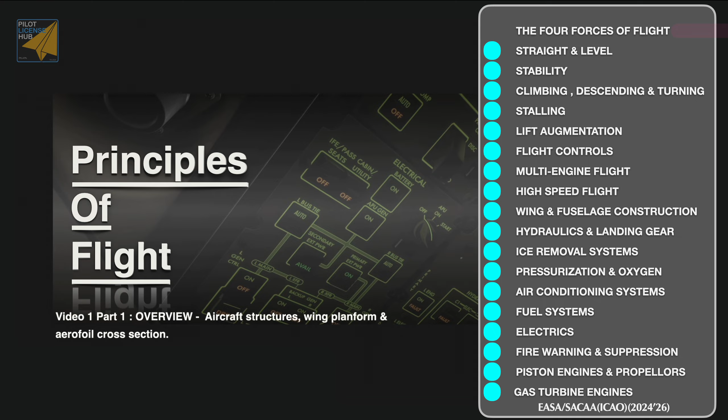Unlocking the secrets of flight requires more than reciting facts. It demands an appreciation of the core principles that keep an aircraft airborne. In this overview, we explore the primary concepts you have to grasp.

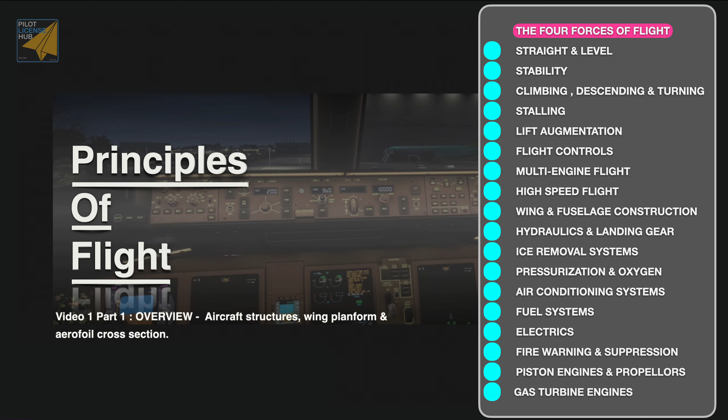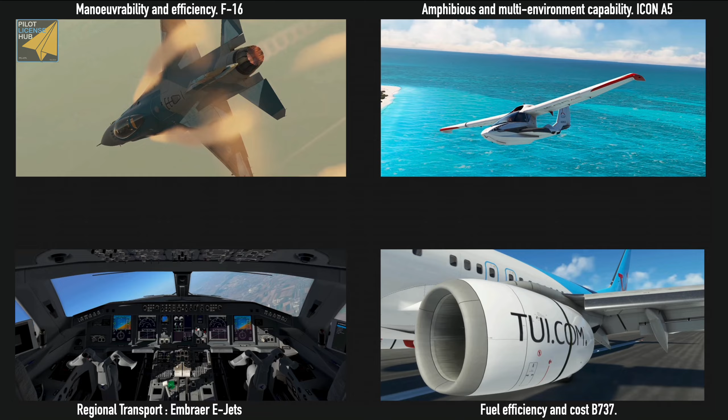First, an aircraft isn't merely a fuselage. It is an integrated wing system where five basic components, including the engine, landing gear, and control surfaces, work in unison. An aircraft can be designed for a variety of reasons, such as amphibious and multi-environment capability, maneuverability, fuel efficiency, and cost or regional transport. Depending on its mission, be it military, transport, vertical takeoff, or another role, designers may even shift the focal point away from the fuselage.

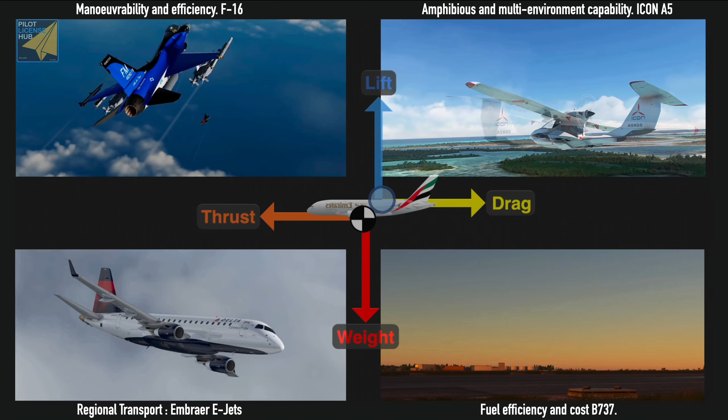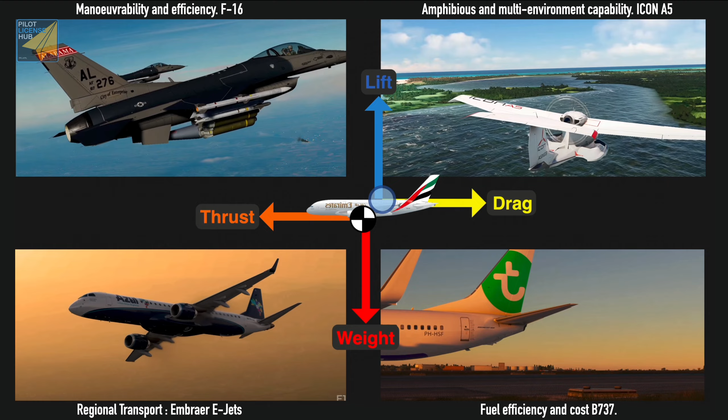Second, there are four pillars of flight: weight, lift, thrust, and drag, whose dynamic interplay is both fascinating and sometimes counterintuitive. This presentation will lay the groundwork for a deeper, more practical understanding of aviation.

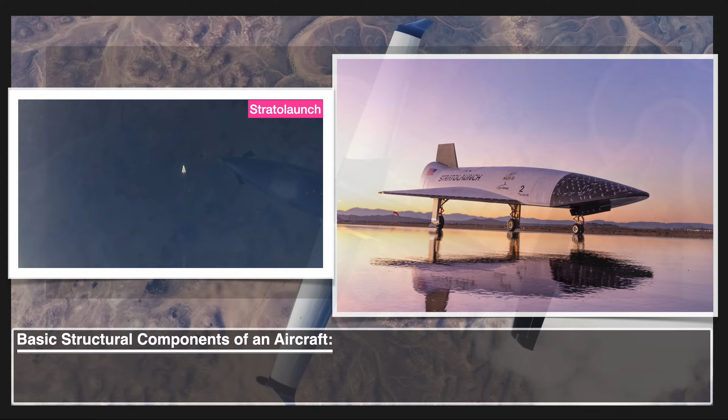Although all aircraft share basic elements, each component is carefully optimized to meet the unique performance standards required by its intended use. To understand where we are today, we must look back at where it all began, from the Wright brothers' first powered flight in 1903 to today's modern hypersonic jets. Innovations such as metal fuselages, jet propulsion, and digital avionics have revolutionized aviation, making flights safer, faster, and more efficient.

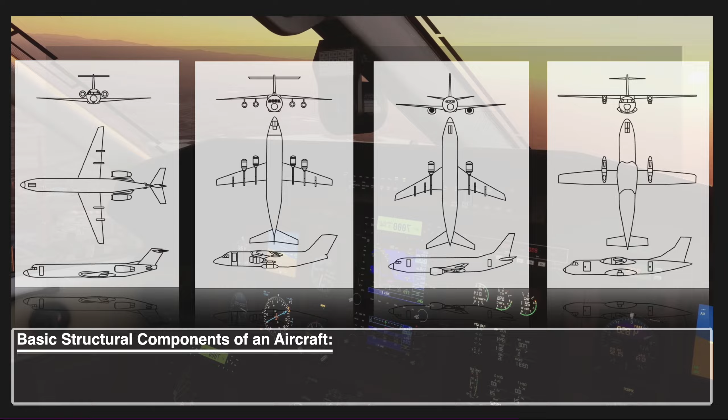The construction of an aircraft involves assembling key sections, each contributing uniquely to its operation. The fuselage, which houses the payload, whether passengers or cargo, serves as the aircraft's central structure.

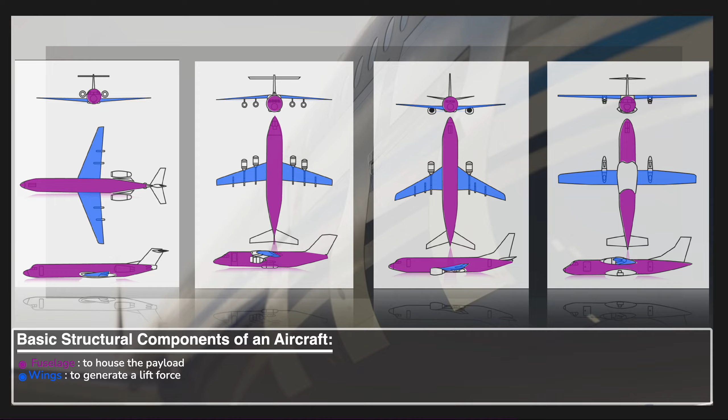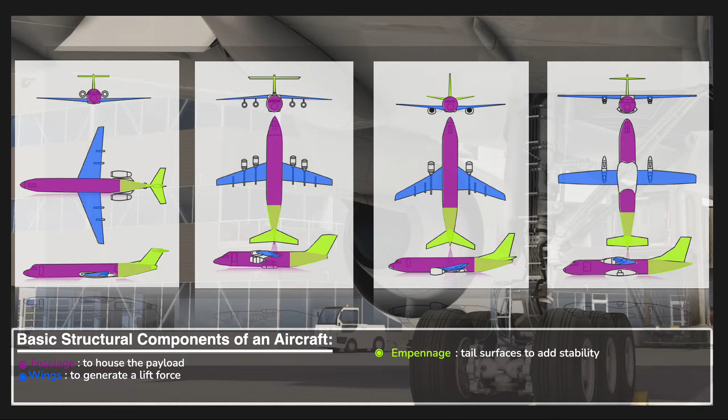Wings provide lift and are often optimized for specific flight conditions such as speed or altitude. Stabilizing surfaces, like the vertical and horizontal stabilizers, along with control surfaces such as the rudder and elevator, ensure maneuverability and balance.

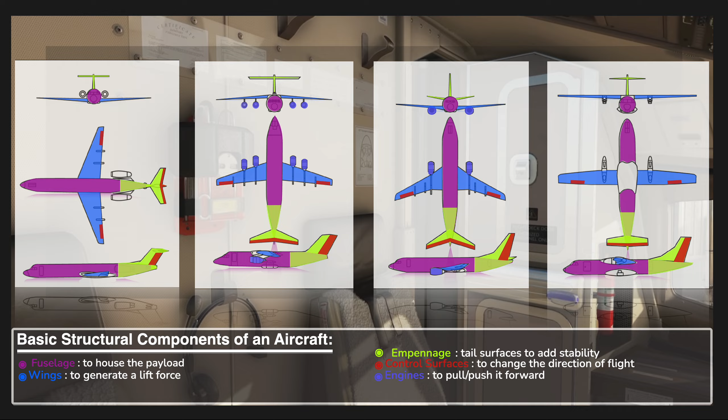Propulsion systems, or engines, generate thrust, while landing gear is designed to absorb shock during takeoff and landing, supporting the aircraft's weight.

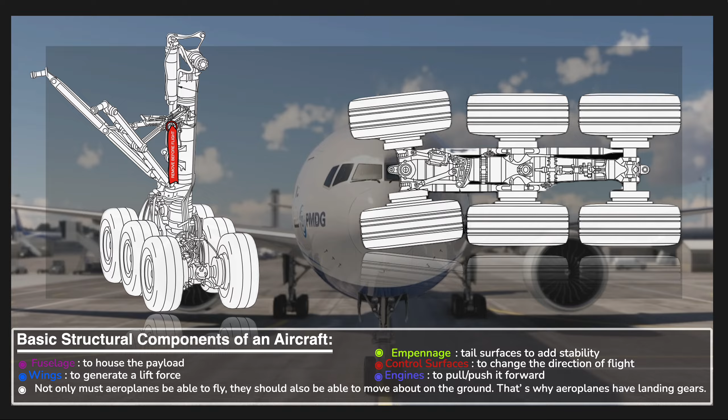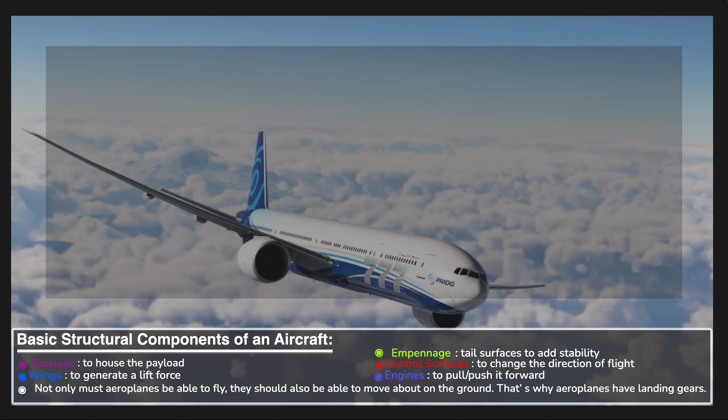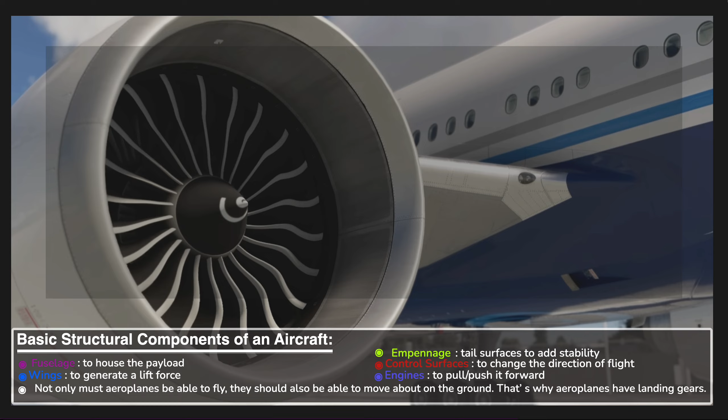These sections are arranged in a specific order to achieve optimal performance. The position and shape of components such as wings, fuselage, tail surfaces, landing gear, and engines vary significantly between aircraft types. In fact, when you view an aircraft from above, its wing configuration immediately tells a story about its intended performance.

Each wing configuration offers a unique blend of advantages and trade-offs. For example, delta wings, with their distinctive triangular shape and sweeping leading edge, excel in high-speed, supersonic flight.

Swept-back wings, which angle backward from the fuselage, are common in aircraft operating in the high subsonic to transonic range. Their backward sweep delays shockwave formation near the speed of sound, reducing drag and enhancing performance, though it may compromise low-speed handling and thus often requires additional control surfaces or lift devices.

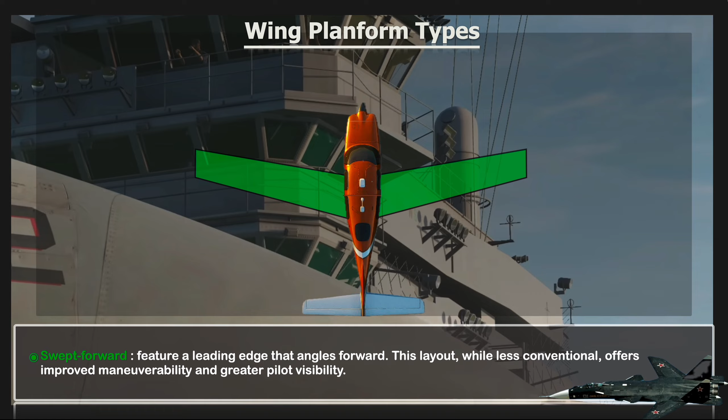In contrast, swept-forward wings feature a leading edge that angles forward. This unconventional layout offers improved maneuverability and greater pilot visibility, but the aerodynamic complexities and stability challenges have limited its widespread use.

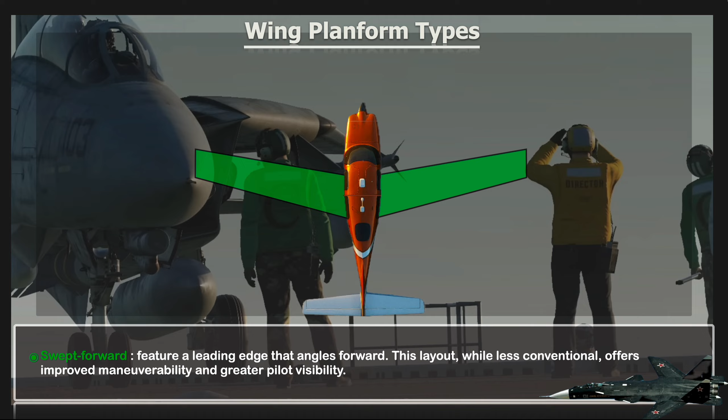Elliptical wings are celebrated for their nearly ideal lift distribution, as seen on the Supermarine Spitfire, minimizing induced drag.

Rectangular or straight wings, with their simple geometry, are easy to manufacture and particularly effective for low-speed flight, offering predictable handling characteristics.

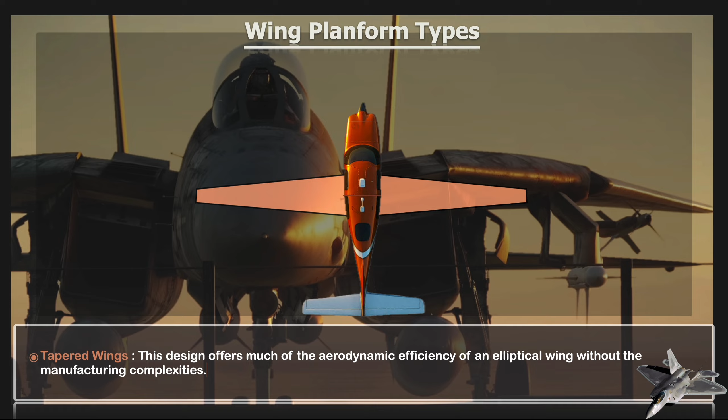Meanwhile, tapered wings strive to emulate the efficiency of elliptical wings while remaining easier to construct, reducing induced drag and ensuring favorable weight distribution.

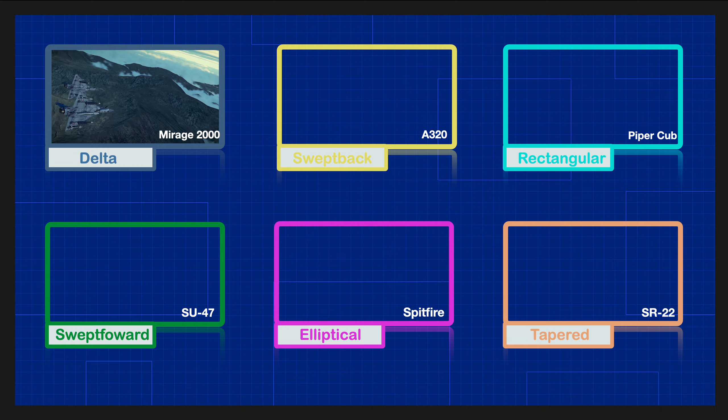Each wing planform is chosen based on the aircraft's mission profile. A supersonic fighter might rely on a delta or swept-back design to handle extreme speeds, whereas a small training aircraft would benefit from the stability and efficiency of rectangular or tapered wings.

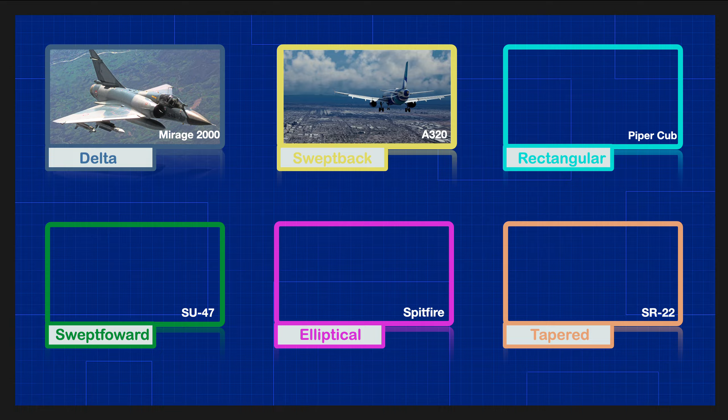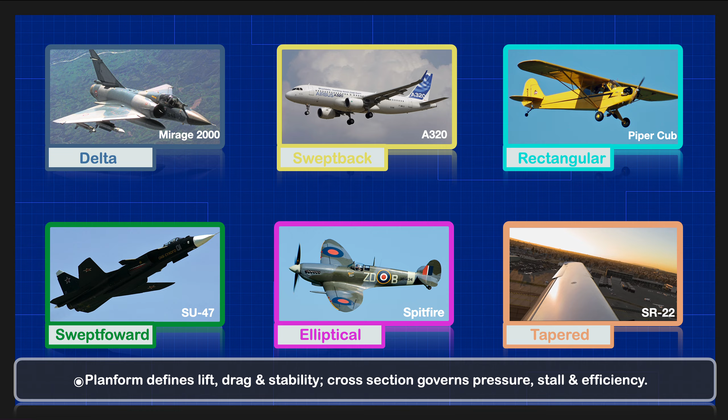As we've just discussed, the shape of a wing seen from above, the wing planform, defines key aerodynamic traits: aspect ratio, lift, drag, and stability. Now, to truly understand how air interacts with the wing, we look closer at its cross-sectional shape. The curvature and thickness govern pressure distribution, stall behavior, and ultimately aerodynamic efficiency and performance.

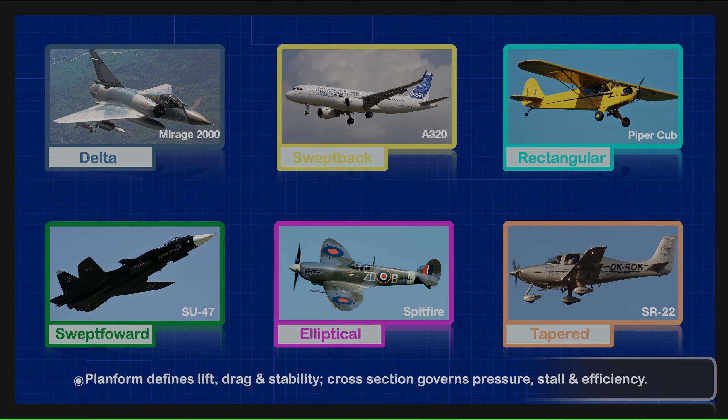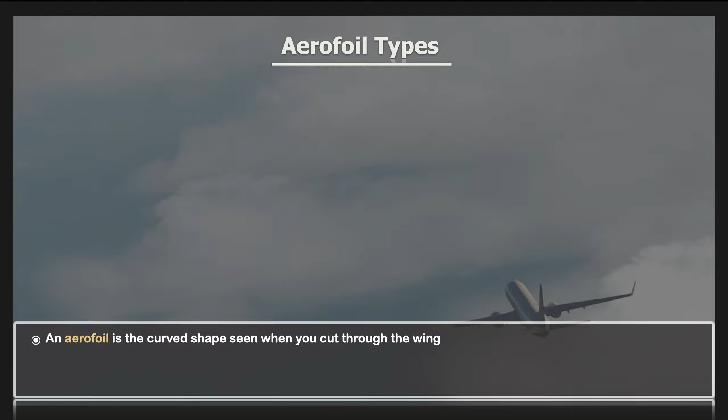The aerofoil, the wing's cross-sectional shape, is another critical factor in determining an aircraft's performance characteristics. Even subtle changes to its curve can have significant effects.

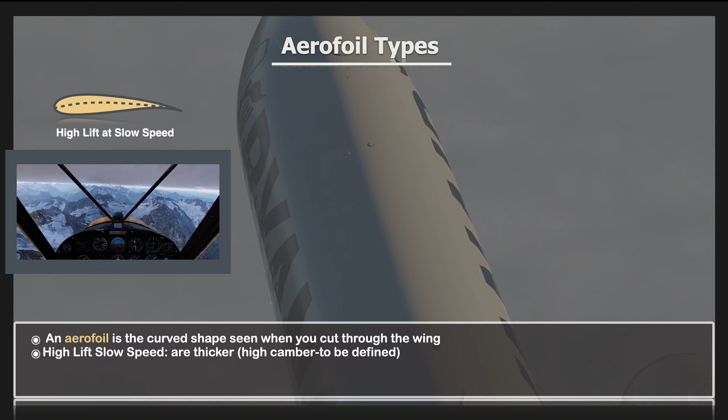Aircraft operating at low speeds, such as general aviation planes, gliders, or airliners during takeoff and landing, need aerofoils that generate substantial lift without requiring high speeds.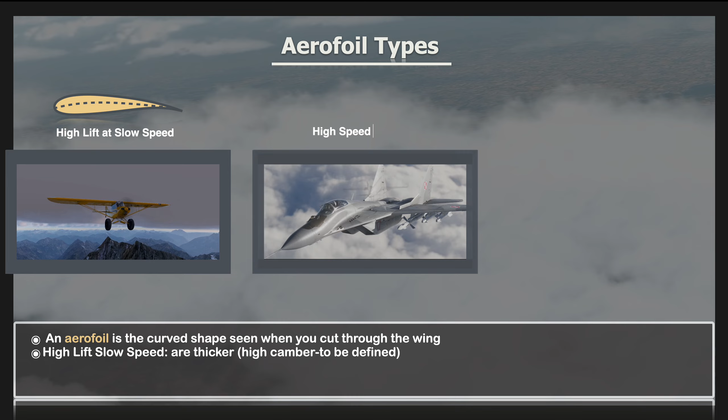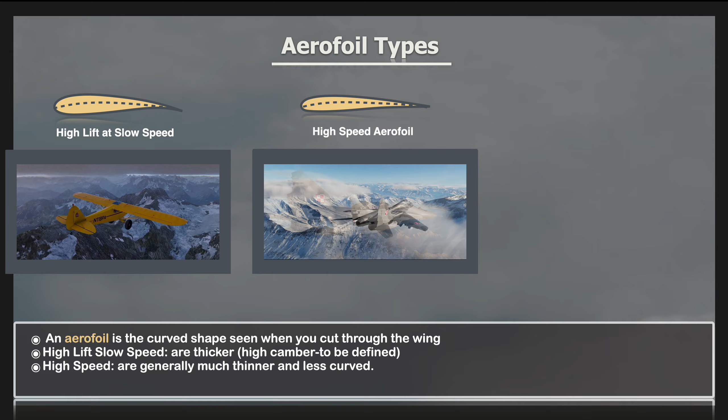When high speed is the focus, aerofoils are typically thinner and less curved to minimize drag. This design maintains smoother airflow, delays the onset of compressibility effects, and improves both fuel efficiency and stability in the transonic regime.

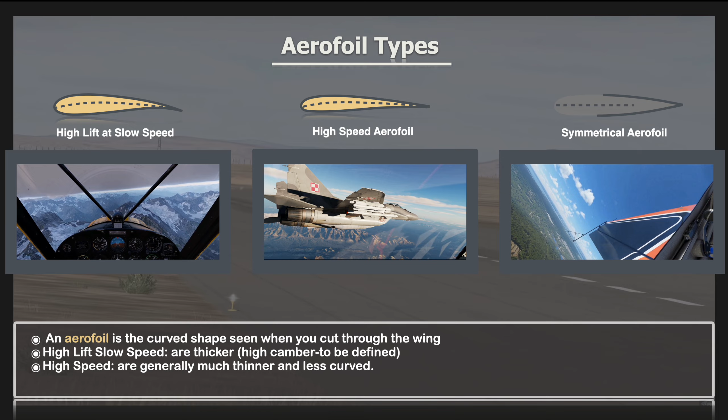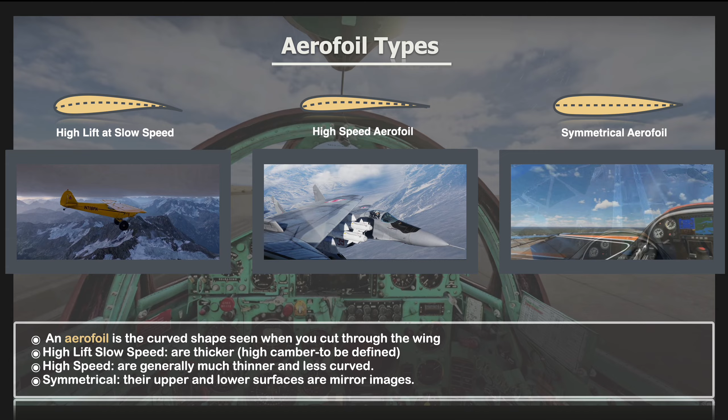Symmetrical aerofoils, whose upper and lower surfaces are mirror images, do not generate significant lift at a zero angle of attack. Instead, lift is produced only when the wing meets the airflow at an angle.

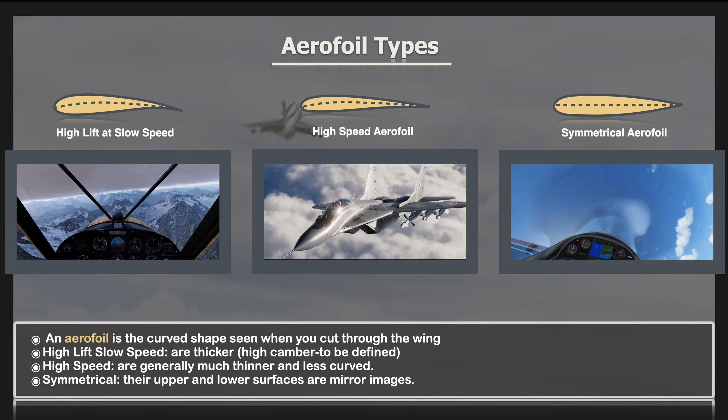This characteristic provides excellent control symmetry, making them invaluable for aerobatic flight or for high-performance military aircraft where precision is essential, whether climbing, descending, or even flying inverted.